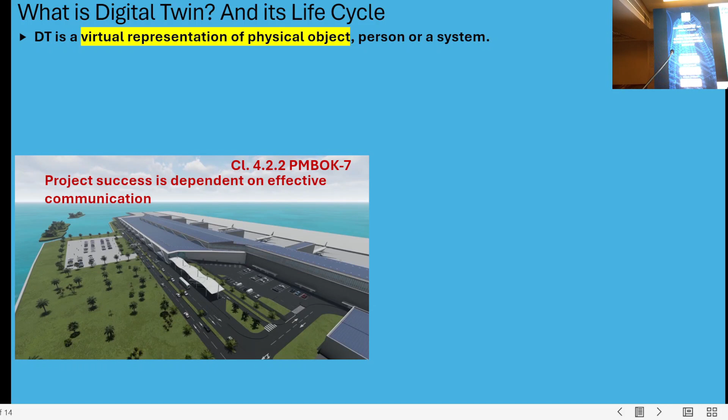I was looking for. So in 1988, I left State Engineering Corporation and joined Saudi Binladin Group, where I got the training as an AutoCAD engineer to develop drawings, because you have to do the calculation, you have to develop the drawing. There is no additional draftsman except for developing the details. Anyway, this is the starting point of my using AutoCAD.

Of course, AutoCAD also can be used to develop 3D models, but it was not that versatile until we discovered this Revit BIM technology, Revit as a tool to develop the digital model. Anyway, since 2007, I have been using this digital model in design development as well as for project management.

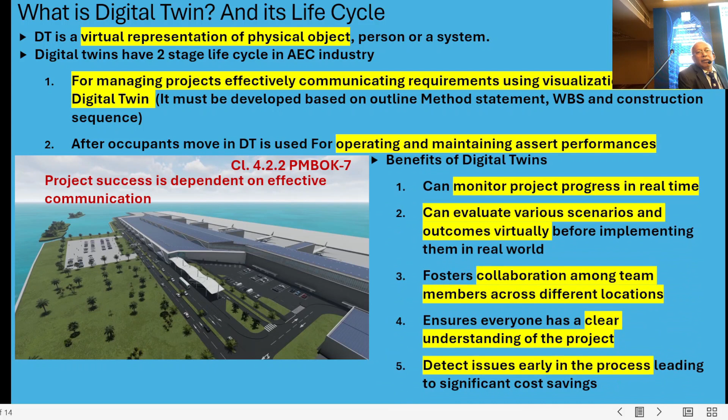Now, a digital twin is a virtual representation of a physical object, a person or a system. Here, the person is important because only when you include a person in the digital twin will you get the proportions right. You can verify these things. And digital twins have a two-stage life cycle in the architectural, engineering, and construction industry.

For managing projects, effectively communicating requirements using the visualization facilities of this BIM technology is the most important thing for using a digital twin for project management. Because if you look at clause 4.2.2 of PMBOK 7, it says project success is dependent on effective communication. So PMBOK 7 Part 1 gives the American standards for project management.

There are other standards for project management like PRINCE2 for British standards and PM2 for European standard. Whatever the standard, it is a known fact that project success is dependent on effective communication. Now the visualization facilities of this BIM technology give a good leverage for you to use this digital twin for project management as well.

And after completing up to LOD 400, you continue incorporating all the as-built details of the actual physical object. And during that time, it will be upgraded to LOD 500 by incorporating all the information that is required for operation and maintenance of the facility as well. That is the second life cycle of this particular digital twin, which I'm not an expert on.

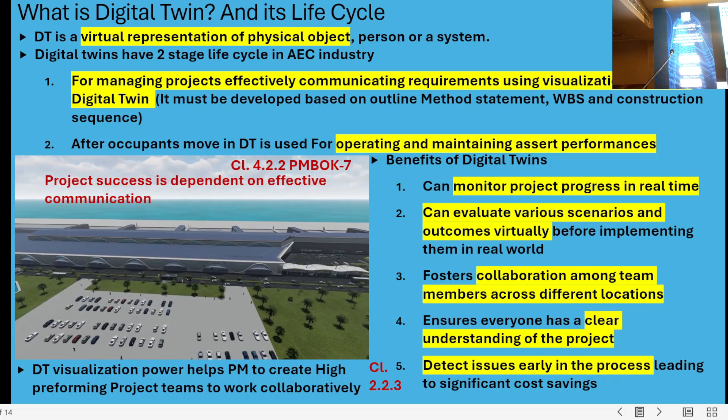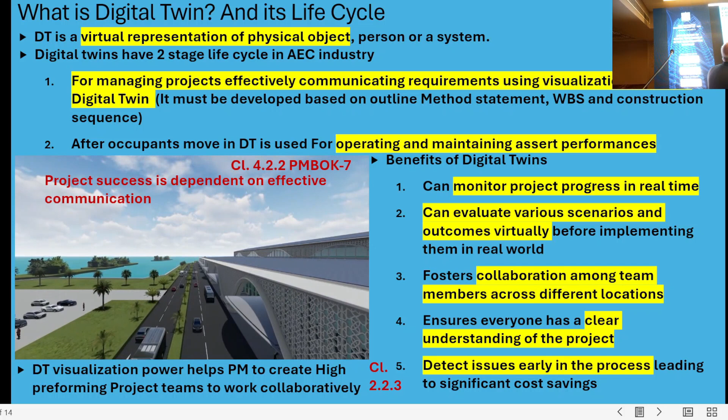Now you can see the video that we created from the Maldives International Airport digital twin, and here is the access road, and it is leading to the departure hall, and you are entering the departure hall now. And here you get the reception desk first, and then you see the self-check-in kiosks and the flight display

board, flight information display board, and after that you get the counters where you can drop your baggage and show your tickets, get your boarding card, and move forward to go through the immigration formalities.

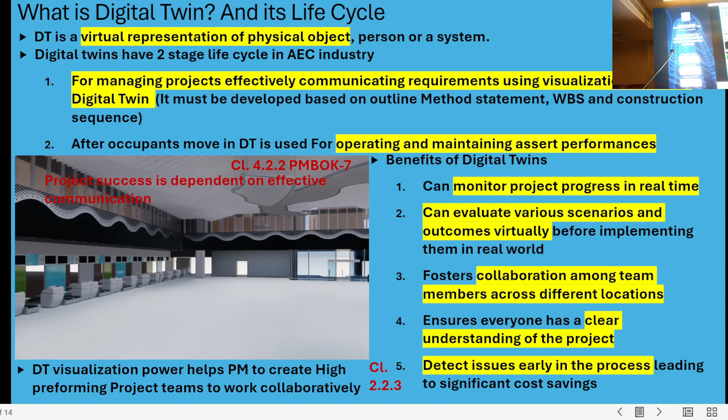Now look here. This is the advantage of a digital twin, where you create a video and you can explain everything to your employer or employer's stakeholders or the project team, so that visualization power can be used for project management. Now this is very important. If you want to develop a proper digital twin, you should follow the level of development specification.

Now here what you see is that this level of detail is important, because in LOD 100 you show only the elements as symbols, not necessarily geometric representations. And then in LOD 200 you develop this particular level, giving the elements as graphical placeholders. I mean, of course, you know this is the wall, this is the opening, this is the floor, but you don't get the dimensions and orientation and things like that.

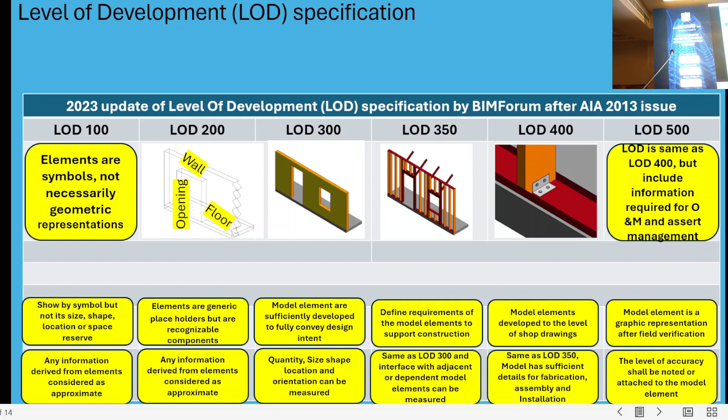But when you go to the next level, you develop the 3D model to give the dimensions, sizes, thickness, and the orientation. And of course, this is the level by which you can take reliable information. And if you are involved in a project which is designed by an employer-appointed consultant, of course, they will develop this up to LOD 300.

Beyond LOD 300, LOD 350 will give the details of the framing, not the fabrication, the framing, because without framing, you cannot make this wall. And without considering the lateral stability and all these things, this wall will not stand. All the details can be given at LOD 350, that is framing detail.

Then you go to LOD 400, where model elements are developed to the level of shop drawings, because you've got to show the connections, the anchors, fixing arrangements, stability with adjacent elements, and all these things will be shown at LOD 400 level.

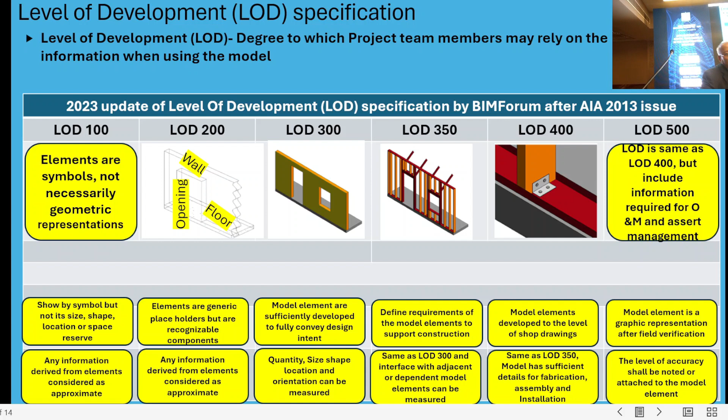Then you go to the LOD 500 level towards the end of the project, where you update all the as-built details in the digital twin and incorporate all the information that is required for operation and maintenance of the facility. So you can know which manufacturer manufactured this equipment, what the warranty period is, what the spare parts list is, so they can store all the spare parts. All this information can be extracted from LOD 500, because it is there as attributes to the Revit families.

Now, there is an important thing here. This digital twin technology is more effective if you are using it for an EPC turnkey contract. There, engineering, procurement, and construction will be done by the contractor. In that case, the contractor will develop from LOD 100 to LOD 500 by themselves. So this is more suitable for EPC turnkey contracts.

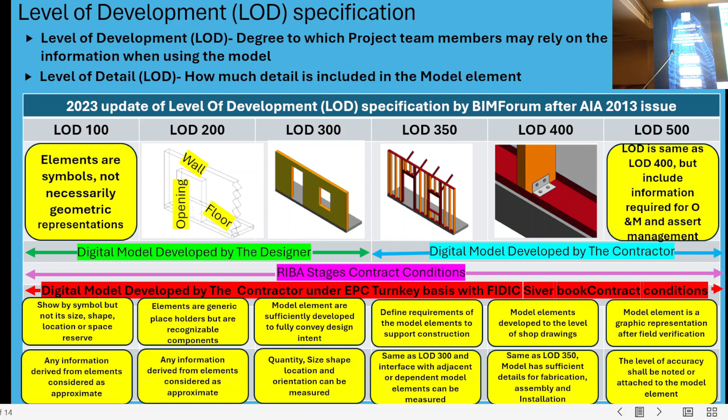In EPC turnkey contracts, the contractor should give two types of performance guarantees. One is 10% of the contract sum. The other one is that the company directors must give a personal guarantee to ensure the performance of the project. Now, in such a situation, you are taking 100% of the risk of the project. So a contractor should have his own control from LOD 100 to LOD 500. The other way you can use it is for RIBA stage contracts. I will explain to you a little later.

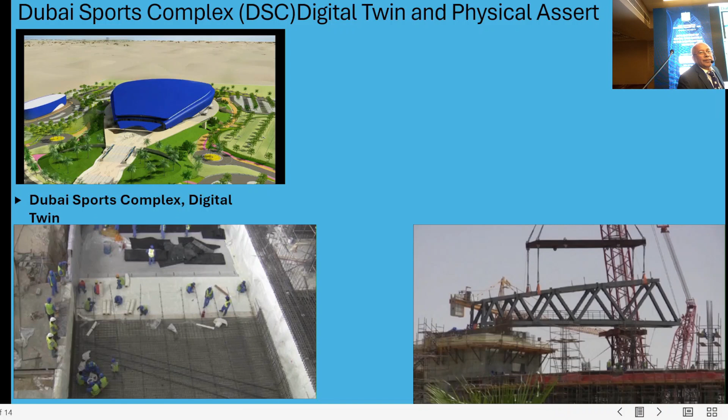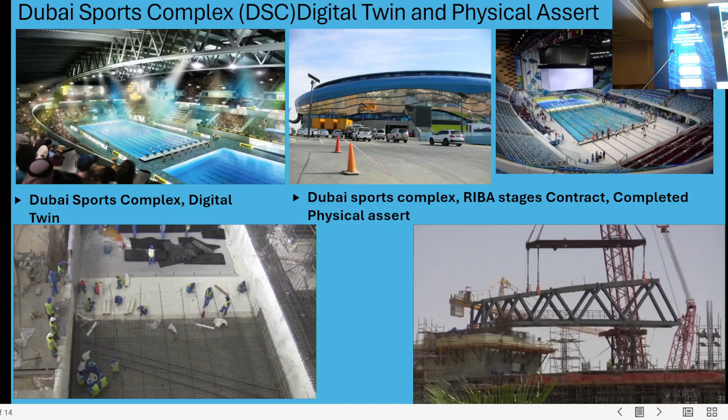Then, of course, this is the Dubai Sports Complex 3D model; you can see the outside view as well as the inside view. And now you can see the physical object after construction. There was a small change here in the cladding to provide some mirror finish stainless steel cladding. Other than that, everything was the same as what you saw. Now you can see here the inside image of that facility, and it is somewhat close to the 3D image of the digital twin.

Now here you see the digital twin provided a visual and interactive representation of the project, and of course the shape of the cladding and the shape of the building, everything was taken from the digital twin, because it was the best way we could explain the requirements to our project team as well as the employer's representatives, the employer stakeholders. Now, of course, this is what we have done in the Dubai Sports Complex.

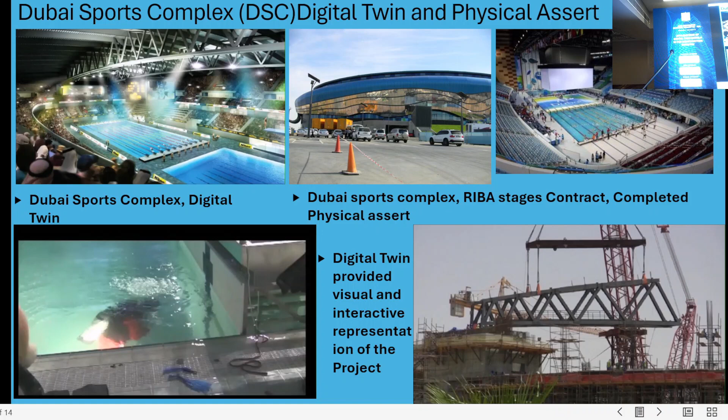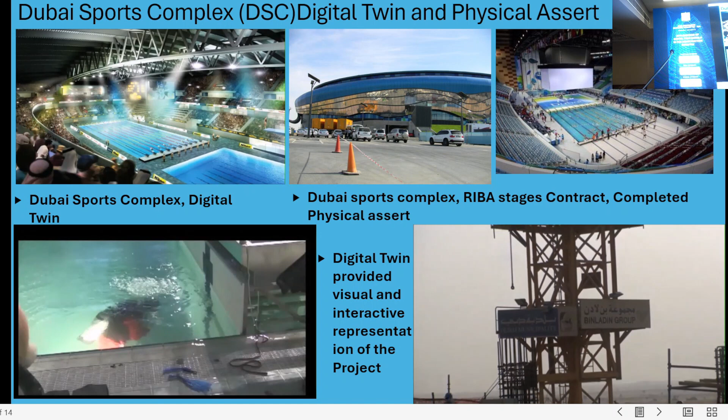This was developed for the FINA World Championship held on 2010, December 10. And these are the structural installations where we again followed the digital twin to get all the details and explain everything. And of course, finally, we delivered the project on time.

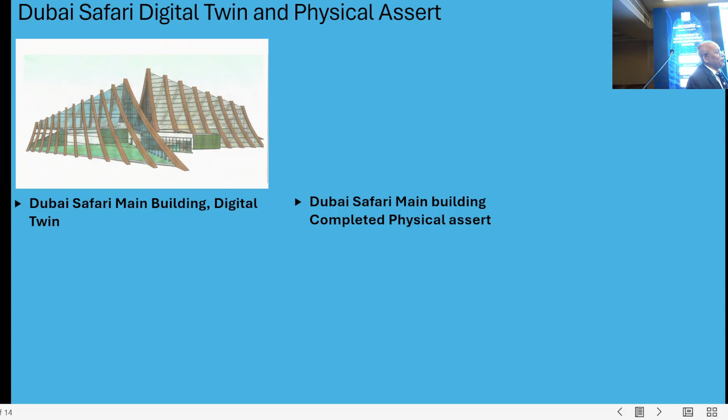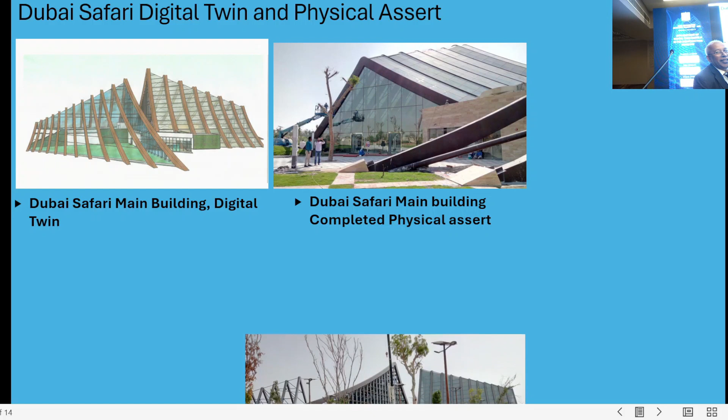And then here is the Dubai Safari digital twin and physical asset. You can see the digital twin of Dubai Safari here. And of course, this is what we finally constructed as the physical asset. This was an RIBA stage contract where the consultant appointed by the employer developed the model up to LOD 300, and then we took over and continued to the LOD 400 and 500 levels.

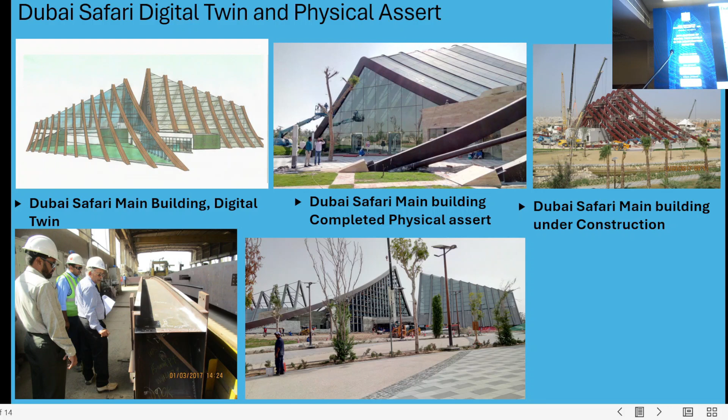We use 8mm thick steel plates to fabricate the box section with welding. The consultant was not happy, and they were telling that Binladin is making money by changing the design and all these things. But my boss was very adamant, and he said, Nihal, you better inspect all these things and make sure everything is done right to have no issues.

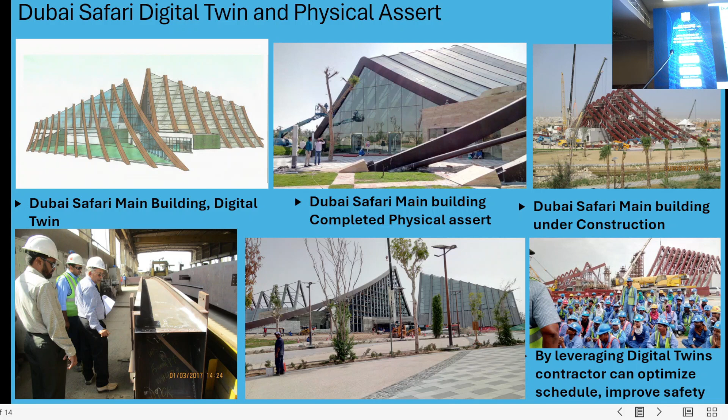Now you can see this image where we explain to the labor using the digital twin what they are going to execute on a daily basis, particularly in toolbox meetings. This is also important, that you use the digital twin to explain things to people, because they can easily understand the scope of work. Now this is the Maldives Airport digital twin.

You can see the building from the air side, as well as most of the aircraft parking locations marked on the ground. This yellow line is the location where the pilot will move his aircraft until he brings the tires to that stop point and keeps 2 blocks on either side of the tires.

This location is decided based on the passenger boarding bridge reach, because the passenger boarding bridge is a telescopic tunnel, and the slope, because if the slope is more than 10%, people cannot walk. Based on that concept, we decide the parking location first for each and every type of aircraft.

In any contact pier, there can be so many aircrafts coming and getting these passengers, reaching the terminal through this contact pier.

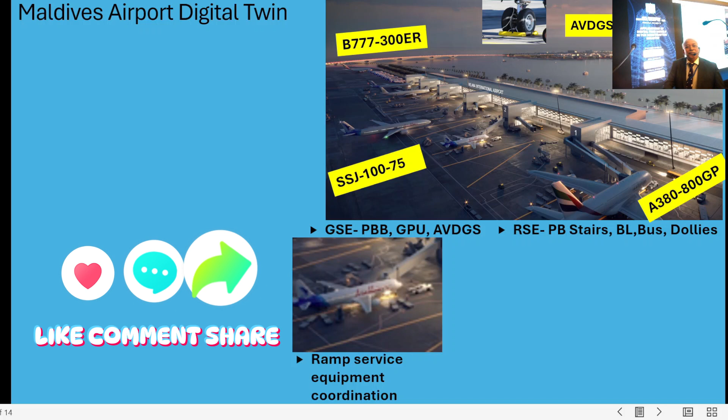Now, efficiency of course depends on the other types of aircrafts, like the SSJ-100-75 and Boeing 777, you can see all these things. Now you see the elevation of this digital twin from the land side.

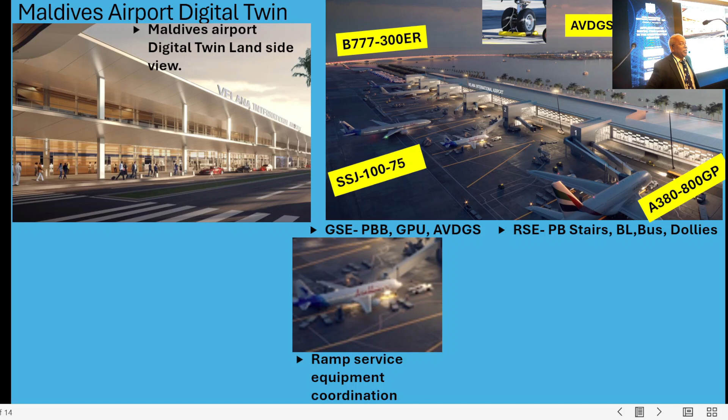Now there is a story behind this.

This land side, you can see the curtain wall inner, and then you have a corridor where the people can move into this arrival and departure areas. And we issued this 3D model, and we derived all the shop drawings for piling work and the foundation work.

We started piling work and foundation work, and I got a call from His Excellency the President of Maldives. We had a meeting, and he was telling me, Nihal, you have done an excellent job, but you have not reflected the Maldivian values in this particular airport development. He was telling me, you outsource this design part to a European company, so they have incorporated all these European values in this particular design. So I asked His Excellency what exactly he wants. Then he said, Maldives, you have all the sea around and white sandy beaches. If I can reflect this wave design and white sandy beaches, that would be ideal.

So I spoke to my architect, and this is what she developed as a facade reflecting these waves and white sandy beaches. It was not a big change, but of course this airport terminal building is 500 meters long. So when you do this change, we added this ceiling here and this facade, vertical facade here, and the original curtain wall, we didn't do any change. Now when it takes to the 500 meters, of course, it will cost them about 40 million US dollars.

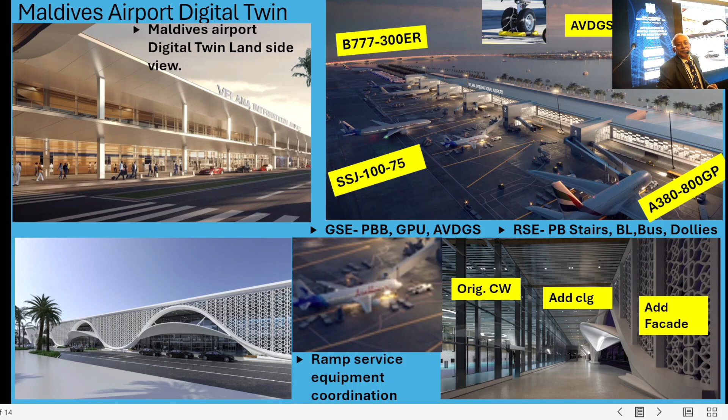And of course, that time, the head of state is giving instruction to the contractor in front of the employer's appointed consultant. He was not happy, because when I said, we will fulfill your requirement, Your Excellency. And of course, at that time it was COVID. So it was to my advantage to get a variation completed, because during that time I could do all the design work from my office.

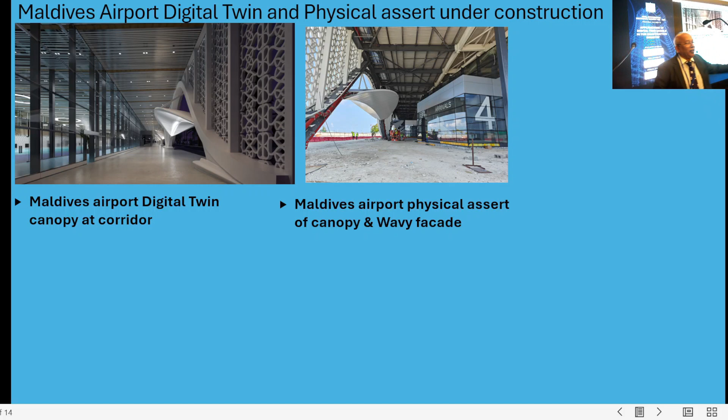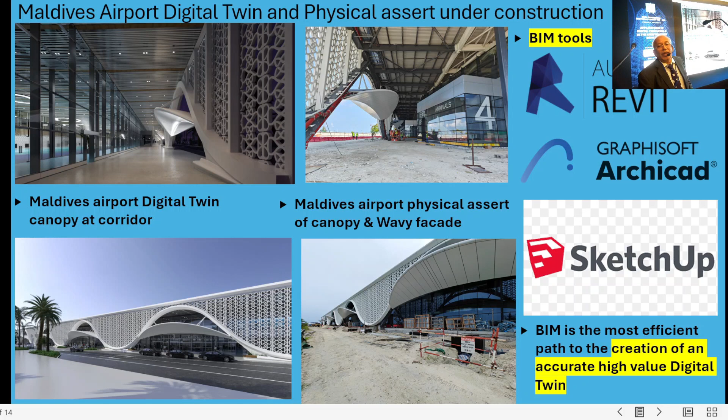Now here you can see the digital twin on the left side, and on the right hand side the actual property is being constructed. Now even the facade, you can see the digital twin on the left hand side, and on the right hand side, the actual execution. All this digital twin, we use Revit, Autodesk Revit, to develop this 3D model.

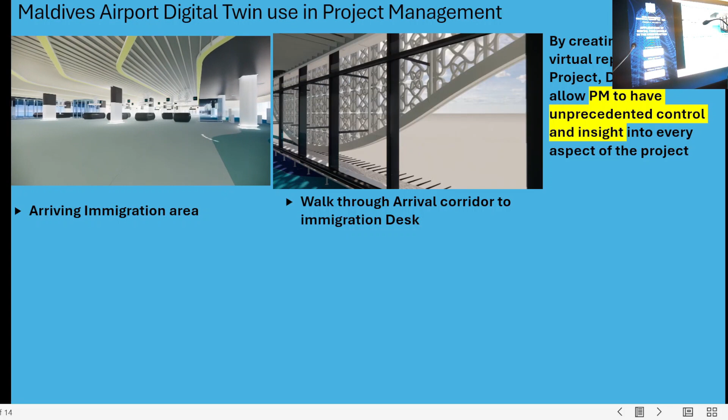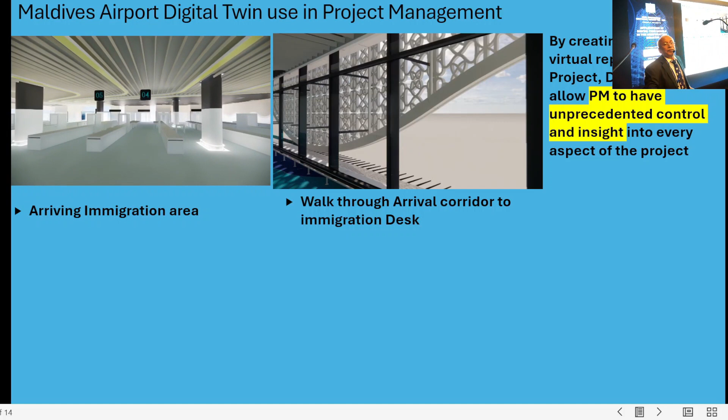Now, this is very obvious here. And now you are entering into the immigration office, where you can see these black desks and cabinets for immigration checking. Here you hand over your passport and they will verify your visa status. If it is acceptable, they will allow you to enter the country. And once you enter past this immigration desks, you go to a scanner where it will scan your hand luggage. Now there you need certain furniture there as well, and all that is reflected in this 3D model. And of course, then you go to the baggage handling area after passing the scanning process.

Now you can see that digital twin provides a common platform for stakeholders to share information, coordinate tasks, and make decisions. This is the advantage of digital twin for project management.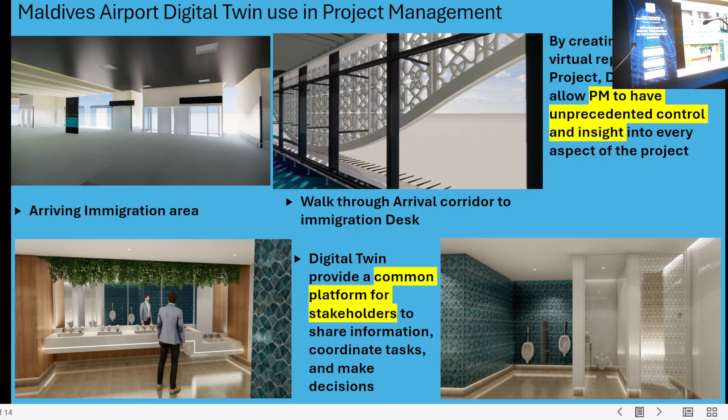Now you can see here a rendering of the toilet, mirror side as well as back side. Now that gives all the details of this particular toilet in one shot, and of course we can get the approval based on this image. And you can see a man model that contains a person as well, so that will reflect the proportions of this particular design. So this is the advantage that we take, because it is easy for us to convince the employers and stakeholders about the design and get approvals on that as well.

And then the next advantage that we took from the digital twin, you can exchange information which is vital for the project success, because we developed the BIM model separately, structural model separately, architectural model separately, MEP model separately, and we got digital twins of the suppliers. Now, for example, this is the passenger boarding bridge digital twin, so we incorporate that in our 3D model. Now, when you integrate all these separate models developed separately based on disciplines, you will find clashes.

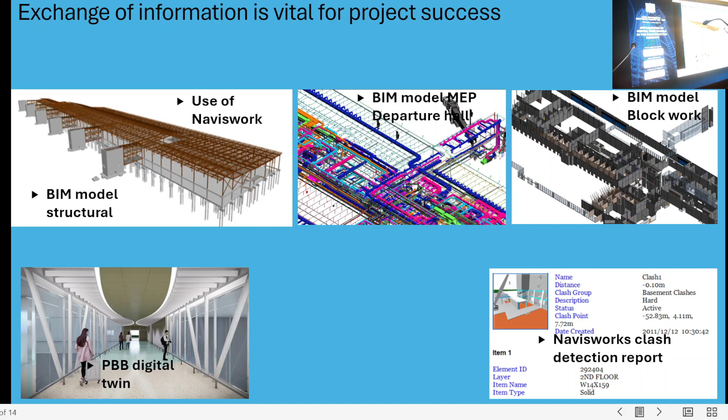Naviswork is another tool by which you can automatically detect clashes, giving a snapshot and description of the clash. Then you can sit down with your structural engineer, architect, and mechanical and electrical engineers to resolve all these conflicts, because you only define what is conflict, what is overlap, and all these things. Naviswork will automatically give you the report.

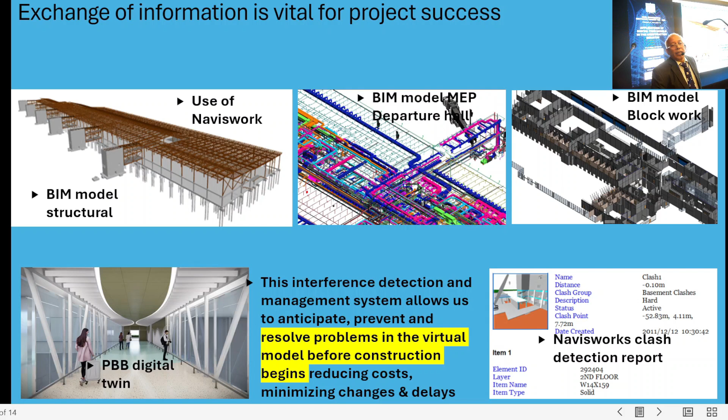Based on that report, you can collaborate very well with your project team and design team, and make all these corrections before construction starts. If you start construction and find clashes, it will be a disaster, because it will cost you a lot of money. This interference detection and management system allows us to anticipate and prevent issues, and develop the construction without breaking the construction activities and losing money.

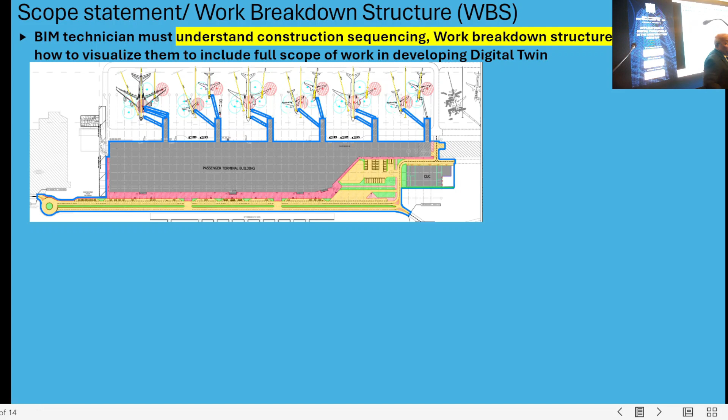For this to happen, to get this project management part done, you've got to break this scope of work into small packages, and these packages should be known to your BIM technician. Based on that, he will follow the construction sequence in developing his 3D model.

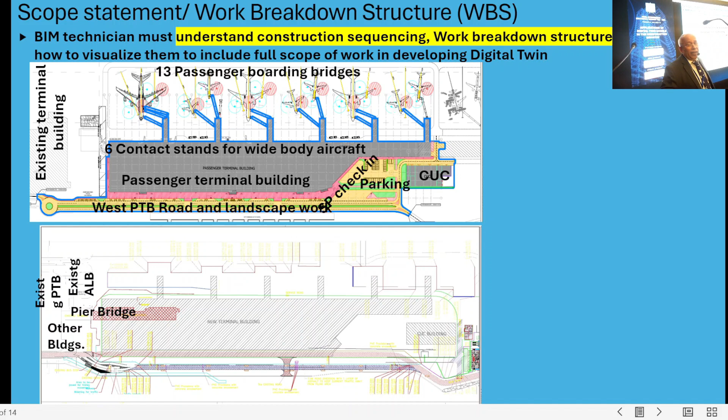13 passenger boarding bridges, 6 contact stands, passenger terminal building, West PTB road, seaplane check-in, parking slots, and central utilities complex, by which you provide all the energy requirements to operate the passenger terminal building. All of that are major parts of the scope breakdown of this particular design.

Of course, the existing terminal building is also there, but there is certain enabling work, like this existing terminal building going to be the future domestic airport. So the domestic terminal must be connected to the new terminal to get the baggage from this domestic terminal to the international terminal. So such work, such modifications in existing airline building modification, other building shifting and demolition.

Pier bridge also is encroaching into the new terminal building area. So all these things, the enabling work and the new work, also break into different parts.

Now you can see the 13 kV underground power line also modeled in the digital twin, because it is one of our scope of work. While developing the new terminal building, we must make sure the existing terminal building operates. For the existing building to operate, this 13 kV underground power line should not be disturbed. So it is there in the model itself.

Of course, when we fixed the tower cranes, they started going over the existing airport road where public transportation is happening. So we had to put a diverted existing airport road to make sure that is also in the scope of work. Not only that, the planning engineers have a thumb rule: they should break all the scope of work into small packages and activities which can be completed in a minimum of 4 hours or maximum of 40 hours.

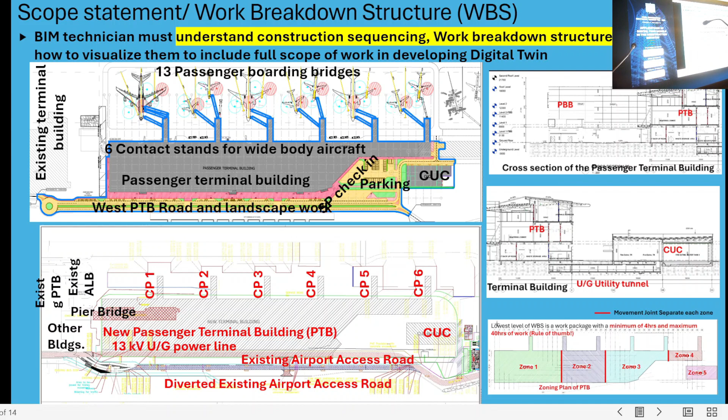Now, when you do such breakdown, such decomposition, you have to break the building also into zones - Zone 1, Zone 2, Zone 3, Zone 4, and level 1, level 2, level 3, and underground. Like that, we develop the work breakdown structure, which is shown here.

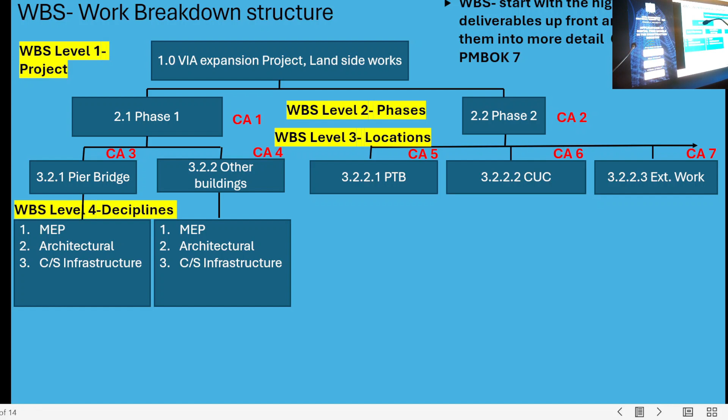Now, level 1 is your project, and level 2 of the work breakdown structure is phase 1 and phase 2. Phase 1 gives the enabling work, phase 2 gives the new work. And of course, even phase 1 and phase 2 further decompose based on the disciplines, because all that work is reported as progress based on the zones.

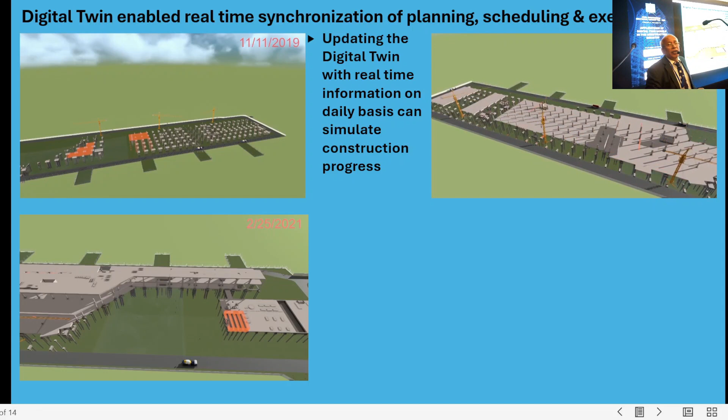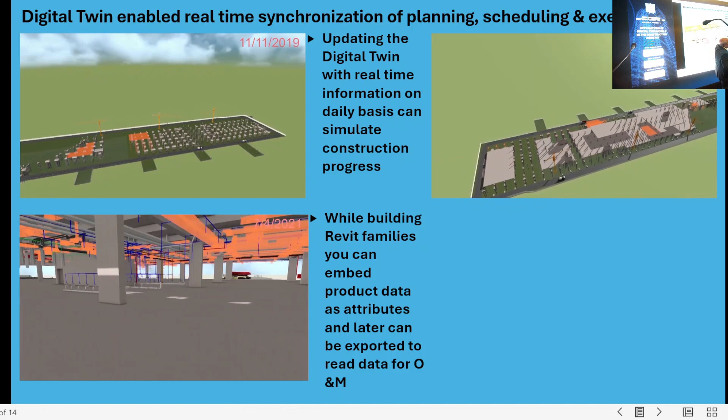Now you can see the foundations are constructed based on the zones, and then you construct the concrete slabs, again based on the zones. Now you can see these 3 tower cranes that I told you were going over the public transport road. And finally, we installed the MEP work and the structural steel work. You can see the date is running - every progress update is based on each date. So this is how we use this digital twin for project management purposes.

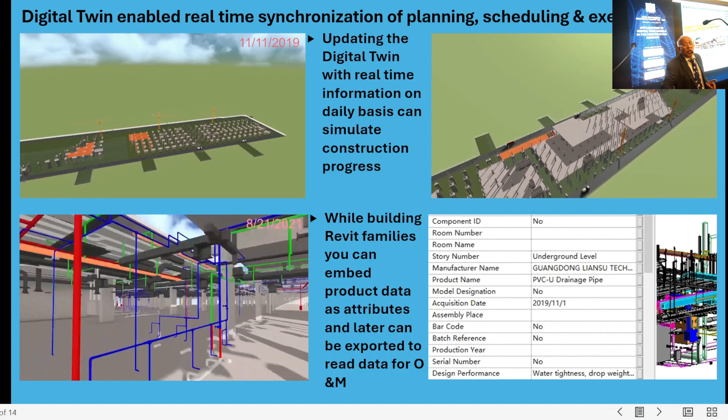And then in Revit, you have a dialog box by which you can give all the information of systems, equipment, everything in digital form, so that they are embedded into the digital twin as attributes. This is the biggest advantage that we have. And here you can see this bird's eye view of the model.

I hope you understand the importance of using digital twin in developing your design as well as managing the project. Thank you so much.